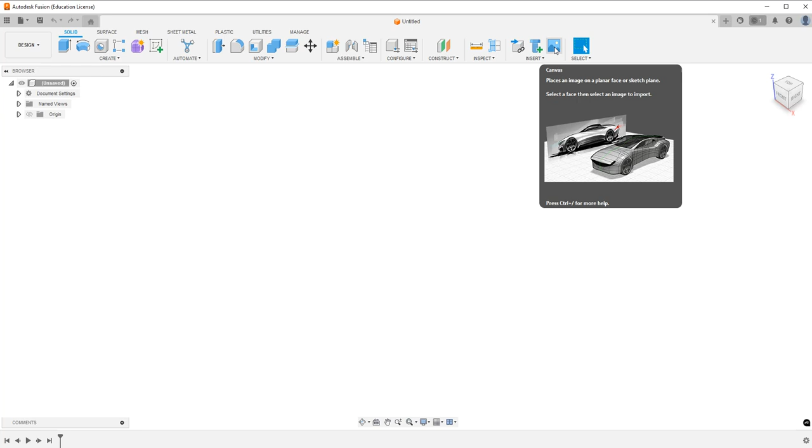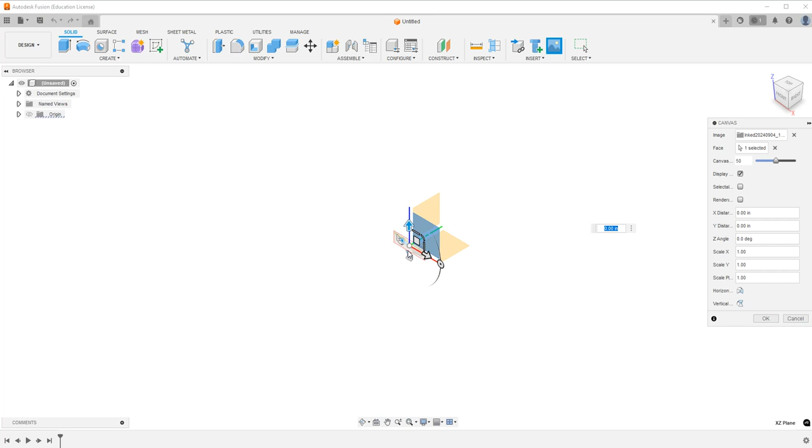Like I mentioned, I took a picture of the specific one this gentleman uses, and I made a design out of it. So I'm going to insert from my computer, go to where I saved it to the desktop. Yep, there we go, inked, and I'm going to open it and place it right here. And if you look, there it is right there in all its glory.

This right here in blue, there was actually a company logo and phone number and everything, so I chose to leave it out. I didn't really want to put that in this video. So all I'm going to do is hit OK.

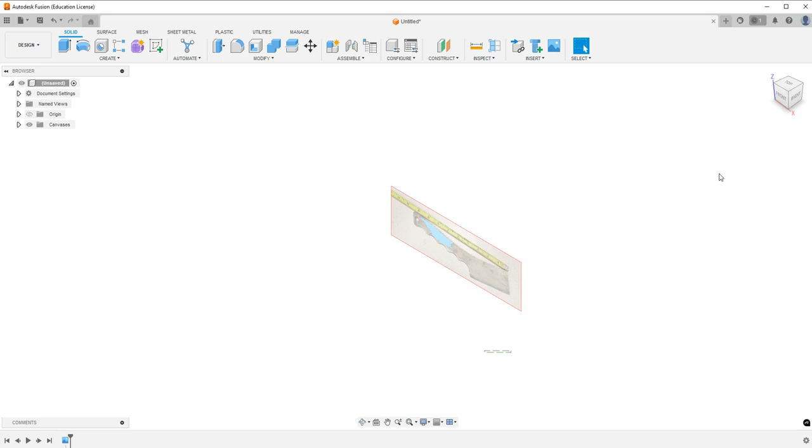And I'm going to go over this way, and I'm going to model off the back. As you can see, I took a picture of a tape measure on here. So what we're going to do is create a sketch on this plane, and take a line from here all the way to here.

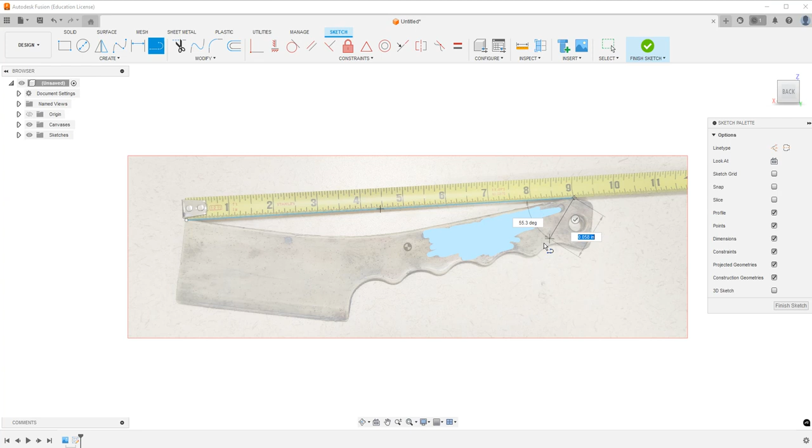And you want it to be exactly 9 inches. So when we measure it, it's 0.478. So what we're going to do is finish the sketch, and delete the sketch since we don't really need it.

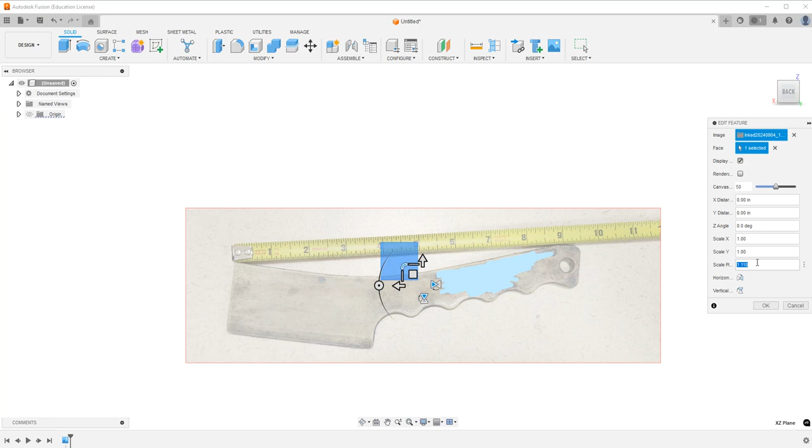We're going to open this back up and scale it. To scale it, we can grab here and move it up and down, or hit scale plane XY. We want the final dimension to be 9 inches, so we're going to enter 9 here. But we don't want it to scale by 9, because that just takes the 0.478 and multiplies by 9. So what we're going to do is take 9 and divide it by 0.478, and that's going to be our final dimension.

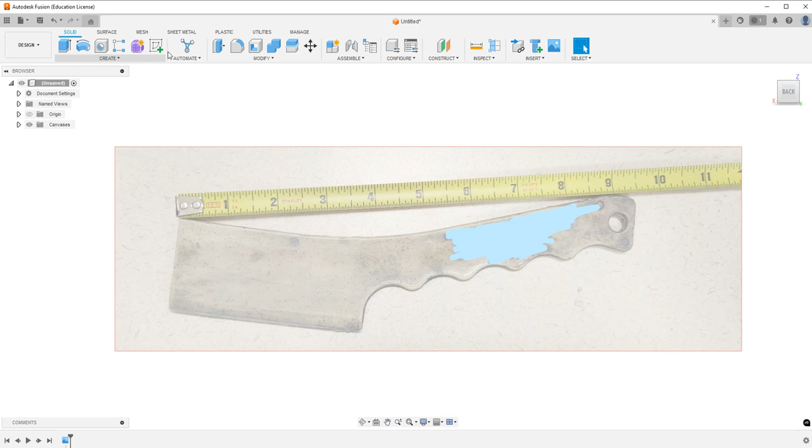If we create a sketch here, we're going to take this line and again go from this point to this point. And as you can see right there, inspecting the lines, it's 9.006 inches, which is totally fine for what we're going to do.

The next thing we're going to do is create this entire profile using lines and splines.

So first we're going to do the really simple one: take a line, put it from here to here, and then from here to here. We can kind of move this around. For something like this, I'm not as concerned about getting everything defined, because we don't really need to in this situation.

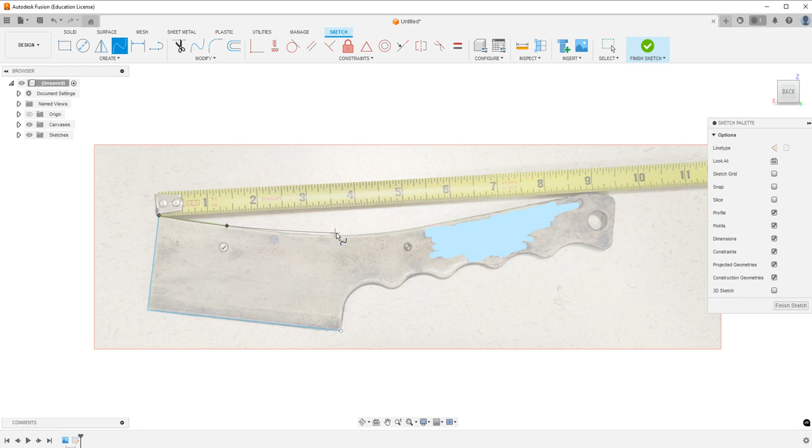So now, because I followed this curvature essentially, what I'm going to do is follow this curve specifically. I'm going to go to fit point spline, hit here, and just start following this curve. I don't really feel the need to be all that exact, and even when it turns this other direction, I just kind of move it to follow this curve.

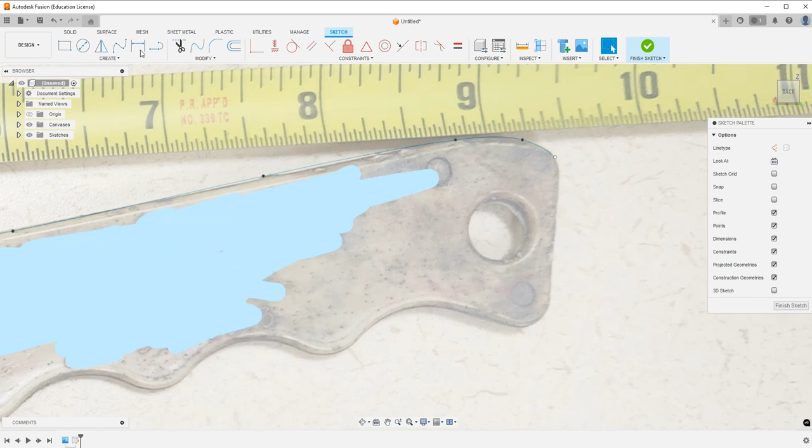To get out of all this green stuff, you just hit escape and then click somewhere else on the screen. Now we're going to zoom in a little bit, and we're going to adjust this just to make it go kind of closer towards the edge.

I'm not really concerned with making it perfect, like this is out here, but it could be right here. It's kind of going out, dipping in a little bit right there. I'm not really concerned about that because this is just going to be a handheld tool. I'm going to take another line and move from here down to here.

Now what you can do is curvature, and you can blend this curve with this curve, but that creates all sorts of weird geometries, and I'm not really a fan of that. What you can do instead is a tangent of this to this, and again it creates a little bit of a weird one, but not as bad.

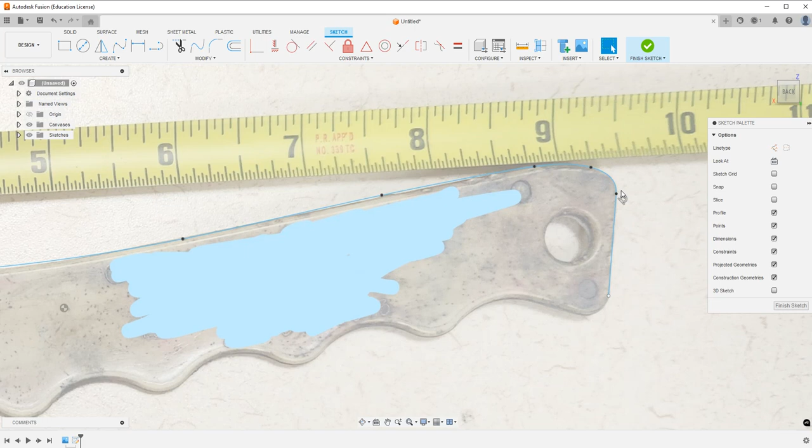So all you really have to do is just pull this final point down, and now you have a completely tangential spline fitting into the line. And then if you want, you can zoom out to make sure everything else is good.

So now comes this handle part, this wavy little guy over here. And again, we're just going to do a fit point spline, and we're just going to follow this curvature. I understand that when you do something like a fit point spline, something that you might not want to do is create a ton of points.

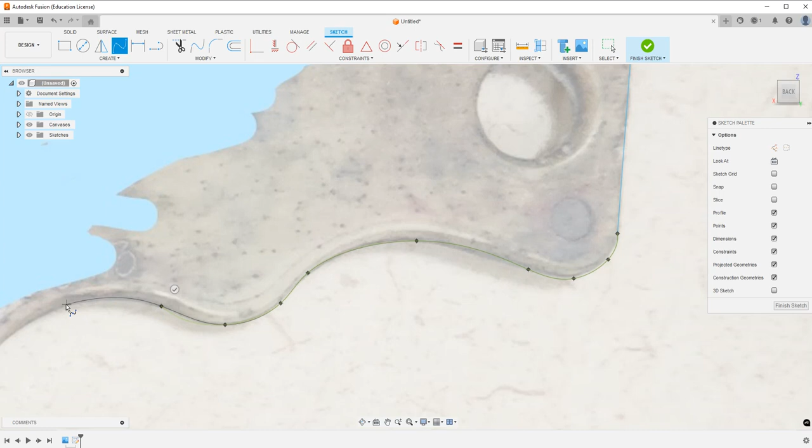But for something like this, I'm not all that worried, just because it is going to be this one sketch and we're done.

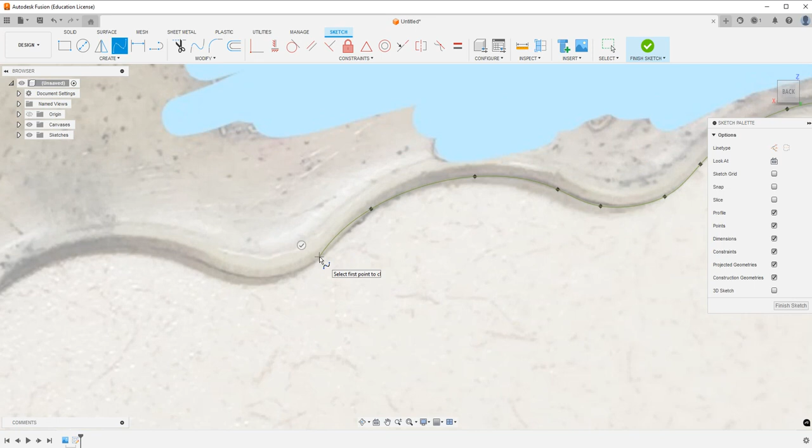And something that you will see is that you will have weird stuff. Like if I hit a point right here, you'll see that there is a little bit of a gap, from here to here. But I find that if you just keep following the curvature of this, then it's going to end up working itself out.

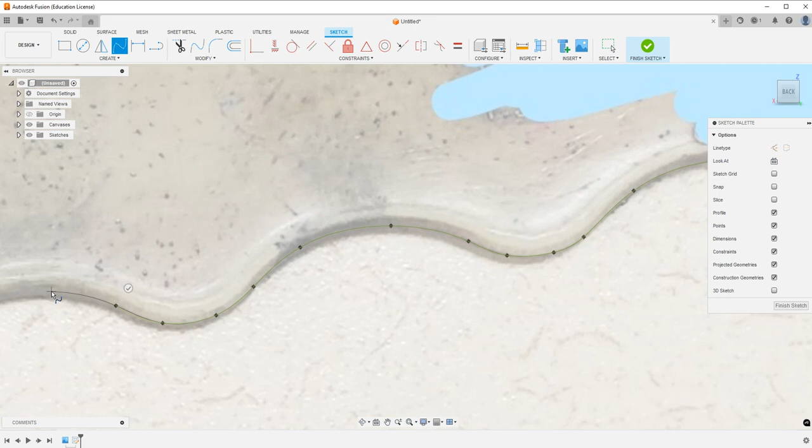Okay, so we'll keep going. The distinction here between here and here, I can't really remember if this is a shadow or a part of this, but like I've said 1,000 times, I don't really believe it matters all that much, just because it's going to be a handle. And that's it.

It's basically just going to be a handle. And I'm just going to stop it right there, and the reason I'm doing that is because I just want a straight line connecting these, and that's it.

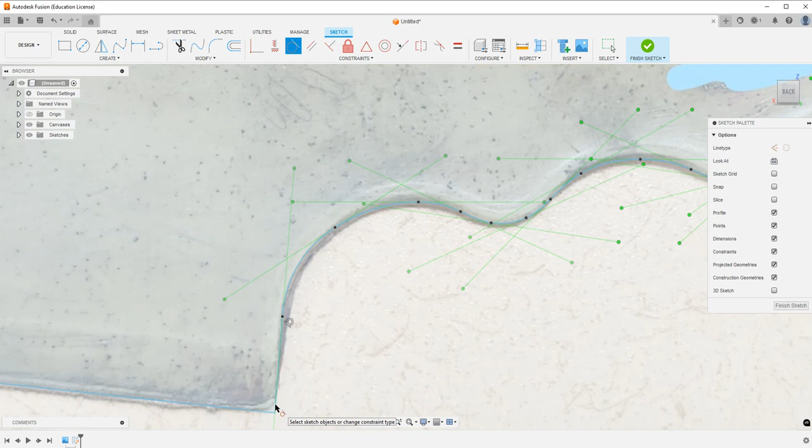I'm going to do another tangent. Although these seem pretty tangential, I'm just going to do it just in case. And same thing over here, I'm going to make a tangent from here to here. And that looks pretty good.

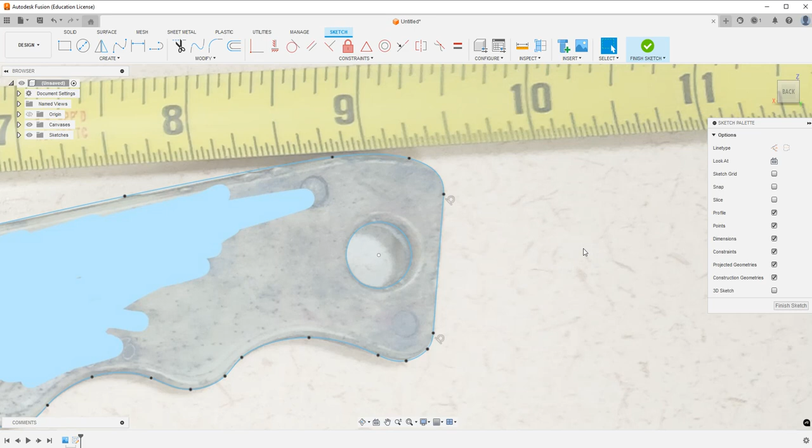Only thing left is that we're just going to do a circle here. So I'm going to eyeball about the center of this, and I'm just going to bring this out. I'm going to probably just call that good. I can move it around if I want, but I'm really just going to call that good.

Now, if we go over here to this tree and we hit this little eyeball, it's going to actually make the canvas disappear. And now we have this outline essentially. So something you can also do is if you want to make this longer, you can grab this and just kind of bring it out and it'll change the length. But I think this is fine.

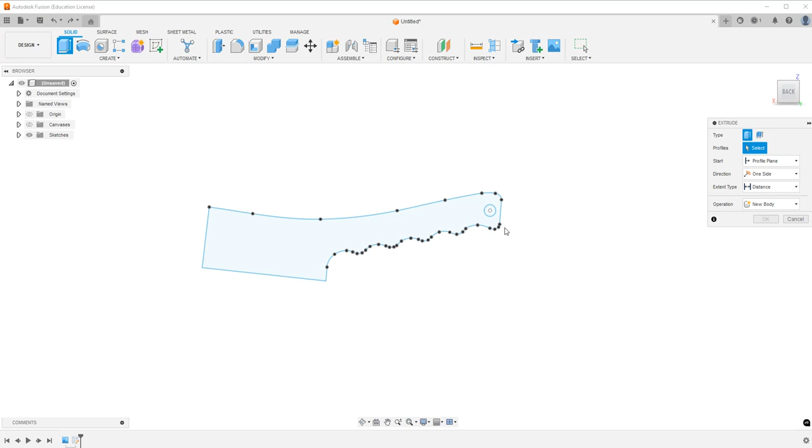And then what we're going to do is we're going to go to the solid tab, hit extrude. And because there are technically two closed sketches, this circle and this outer actual part, we're going to hit the outer part.

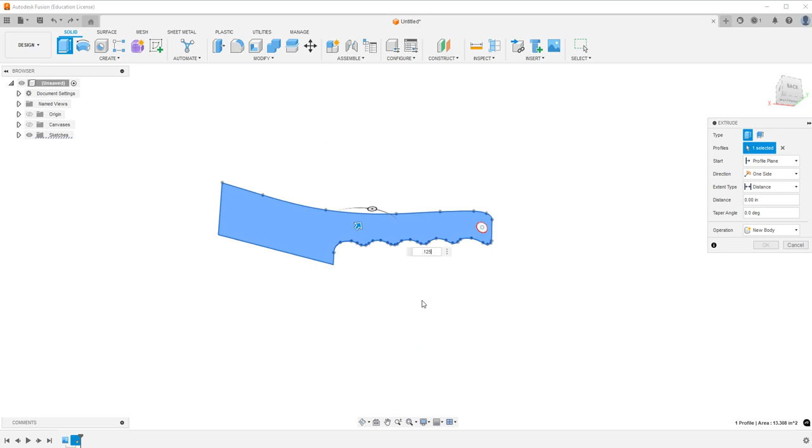And these things are fairly thin. I don't believe that it actually gives me a thickness on here. Let's see, total length is 12.5, which ours is not. Handle is 5.5 inches, blade is that. So it doesn't give us a thickness, so we'll go with something relatively thin. We'll maybe go 0.125, I think that should be good.

For this, I don't really care if we have a direction, I'm just kind of making it go in one way. And that's pretty much it. One thing I am going to do is take a fillet.

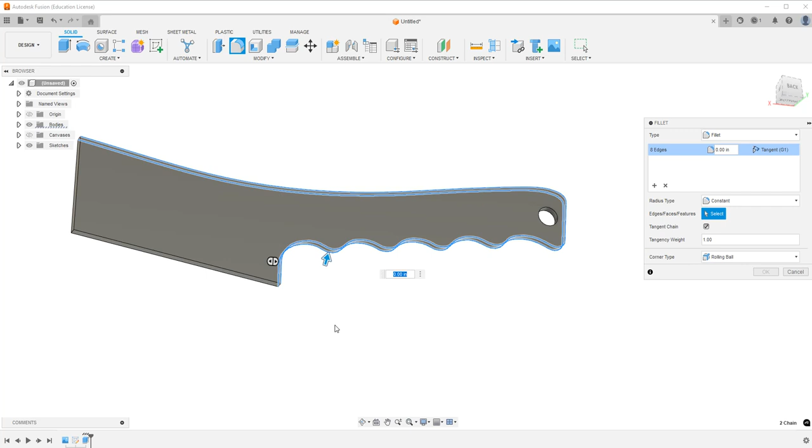Here and here, because I want these ends to remain fairly sharp. Since we did 0.125, we'll just go 0.03 and call that good. That's pretty much it. Oh, one thing, this I usually like to make nice and smooth. So we'll go with this.

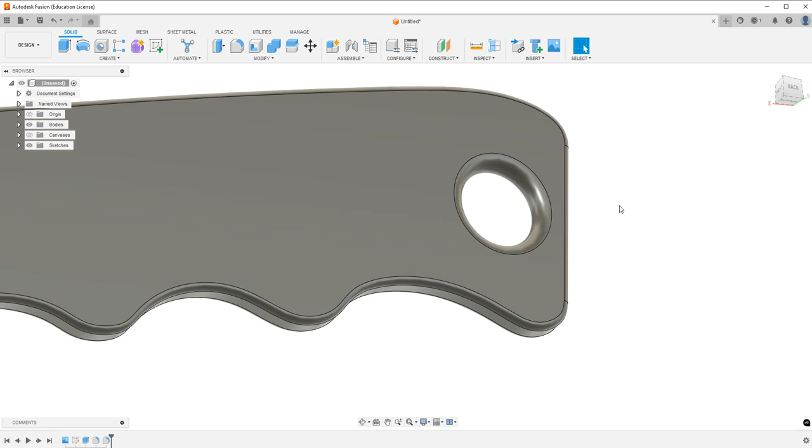Let's try 0.0625, which is half of 1/8 of an inch. And that is good. That is our paint scraper.

That's literally it. Like I said, the geometry didn't seem very complicated, but I know a lot of you guys starting out in 3D modeling might be like, I don't know how to design those. A lot of the time, when you design something fairly simple, it really is as simple as taking a picture of the thing, putting it in your software using the canvas feature or canvas tool in the insert tab, and just start tracing the outlines, and eventually you can make it. This is something I actually do a lot when I design things.

For example, if I want to put a company logo on, say, a pen holder, which is a video for another day, I can do that. If I want to put my name on something, I can do that. Heck, something I do sometimes is make coasters, and if there's a band I like, I might find the band logo or maybe a lyric that the band uses, and I use that.

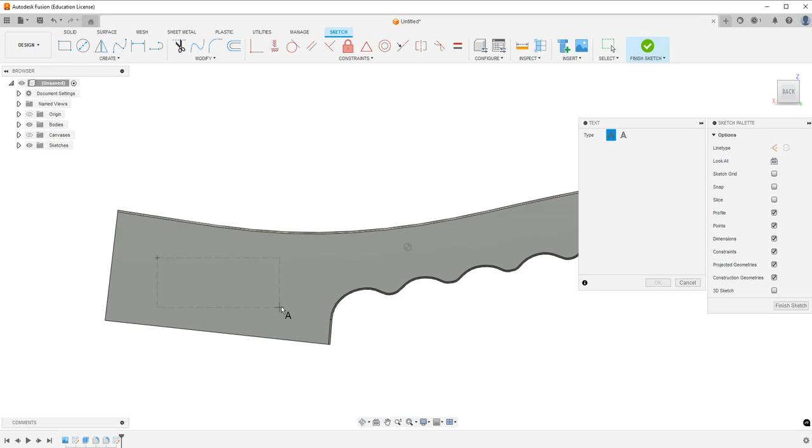For something like that, for more of a lyric, if you go into the create sketch, I'll just do this real quick. You can hit this text and then write something and sketch it out from there. But it's not something you really have to do. I'm just going to get rid of that.

So that is it. I hope you guys enjoyed this. I know this was a bit of a faster, shorter video. I tried to explain hopefully some stuff that you guys would understand, because a lot of this stuff is used in the real world.

A lot of the 3D designing and 3D printing I generally try to have real world applications. I don't really like to make things just for fun, because in my personal opinion, you can make something for fun and get a lot of enjoyment and experience out of it. But if it's not something that's ever going to be applied in the real world, you're limited a lot by what you can learn from it. But that is just my opinion.

If you guys like designing for fun, by all means, design for fun, it is all good. I know a lot of YouTube channels make these large, intricate 3D models, and there's a lot of information on those which you can glean, which I do from time to time. I really think it helps me out. I don't claim to know everything, guys, but I always try to learn as much as I can from other people. I'm kind of talking without stopping.